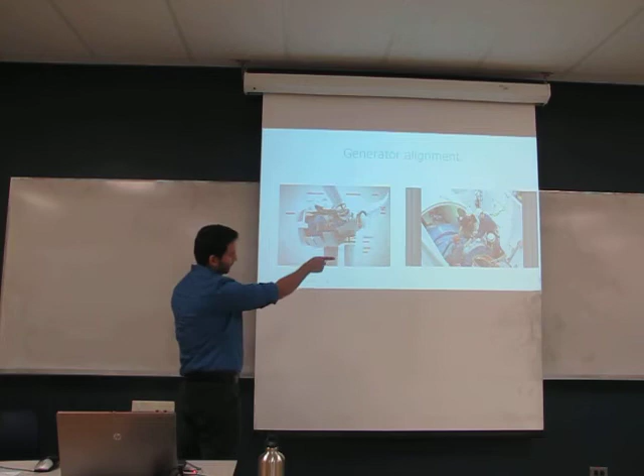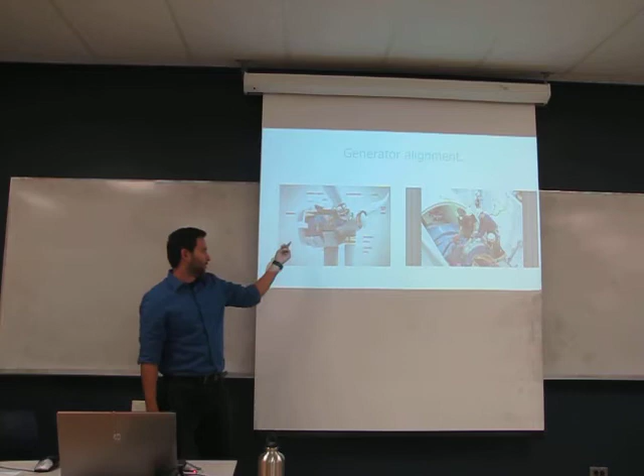Another task was a generator alignment. What you can see over there is three technicians working on the generator. The generator is located on the back part of the turbine. You can notice that the generator is connected to a shaft, which is connected to the blades.

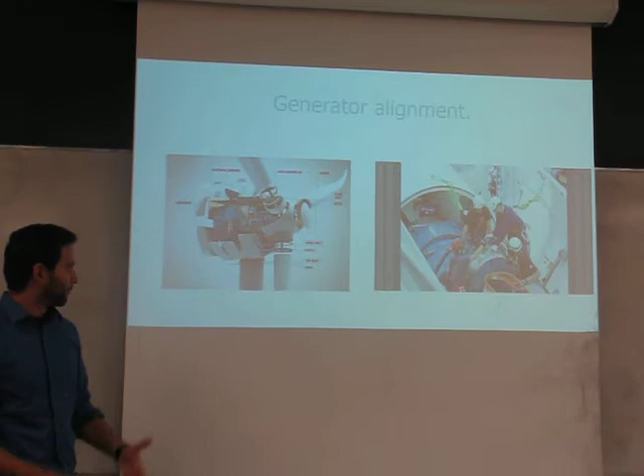With time, because of the force of the wind, that shaft may get a little bit twisted, and that might result in damages to the generator. So we would normally spend like 4 hours measuring and using some hydraulic jacks to make the shaft in a straight angle with the generator.

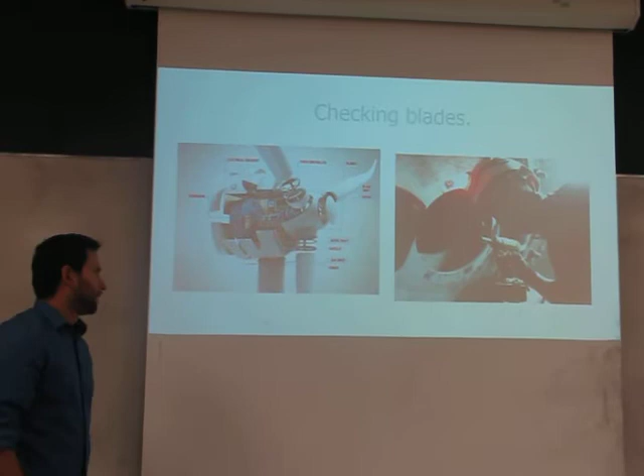Another of the tasks was checking the inside of the blades. The blades of the turbine are made of fiberglass. They are hollow inside. So in that picture, I am inside what they call the hub, which is this metallic, it's a sphere made of metal. The blades are connected to it.

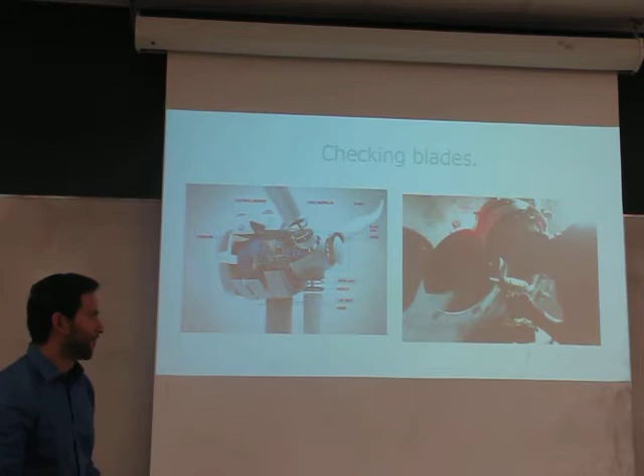Normally I would go inside that hub. Inside there is a very dark place, so you use a headlamp to get some illumination. You're supposed to go and check if there is any crack or any sign of damage.

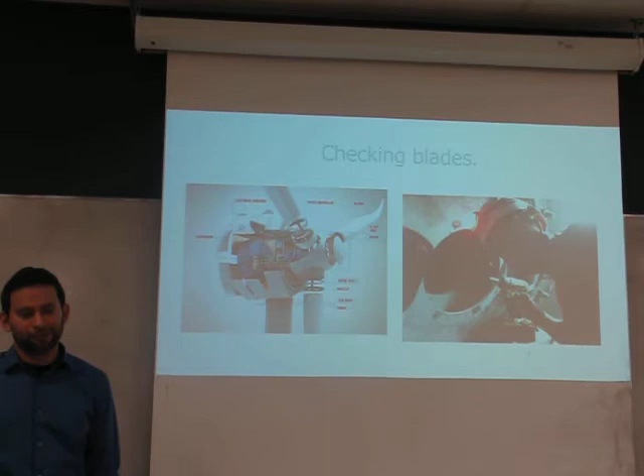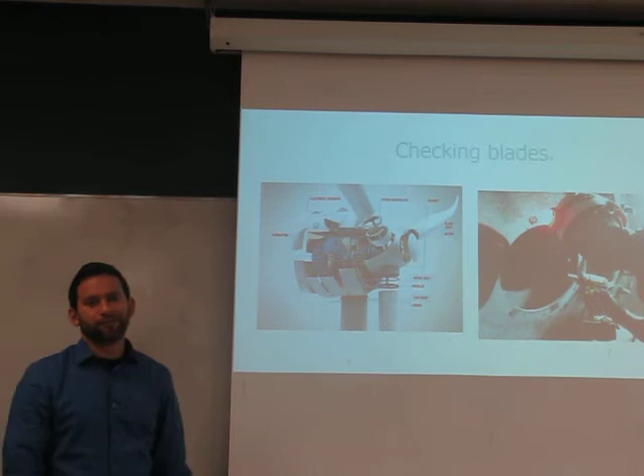Other than that, you're supposed to check what they call a lightning card, which looks like a regular credit card inside an electronic reader. What it does is that every time lightning hits any of the blades, that card can register data from that, like voltage or current going through the whole tower.

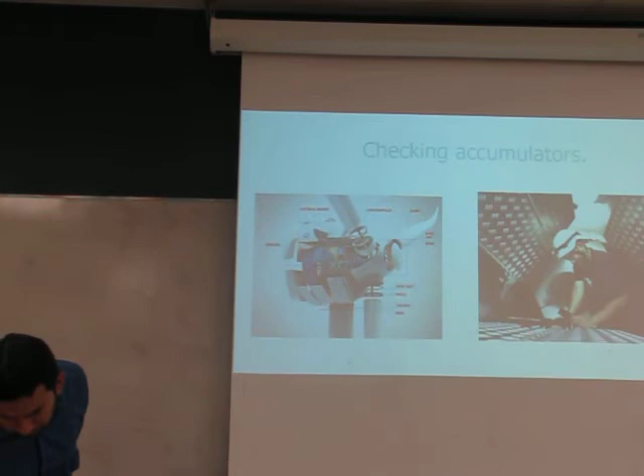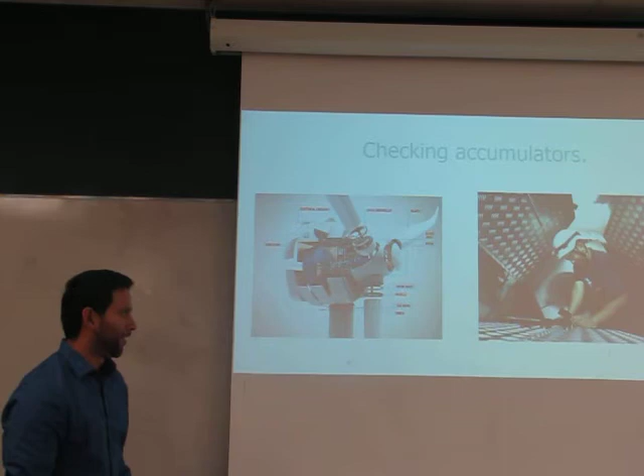Checking accumulators. On that picture, I'm still working inside the same part. That was one of the many confined spaces that you get to work in when you are up there. My job there was just checking the pressure of around 9 cylinders full of nitrogen.

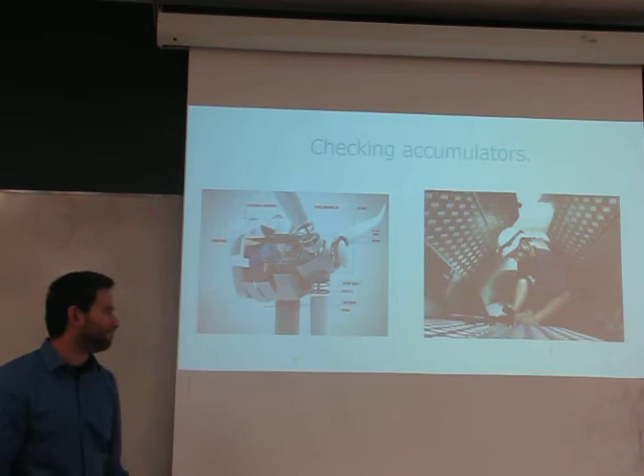They are used to keep the pressure of some pistons that move the blades of the turbines. And the blades move 180 degrees to try to catch the best wind they can. So the accumulator needs to be at a very specific pressure.

On the last part of the service for the turbines, we would run some tests. The test consisted in moving the turbine 360 degrees, moving the blade, as I explained before, and checking the crane on the top of the turbine. That is the crane that we used to get all the bags full of tools, because there's no way that we can climb with all those tools. Each bag is around 50 to 60 pounds.

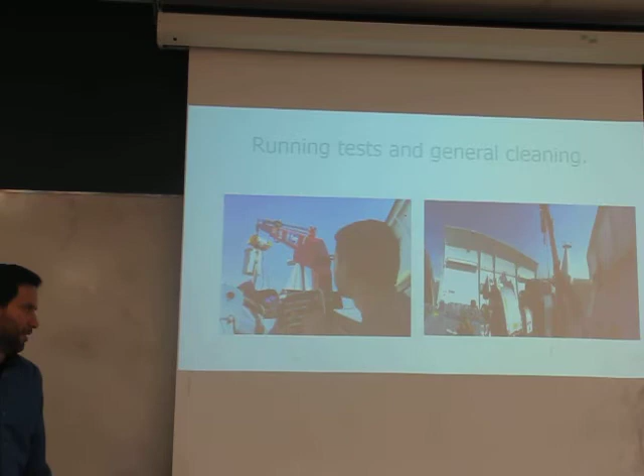And after that, we would spend the rest of the day cleaning everything, because after changing the grease, changing oil, changing some filters, everything is full of oil. So we would spend probably around 4 hours cleaning with the sprays and rags until everything is shiny and clean.

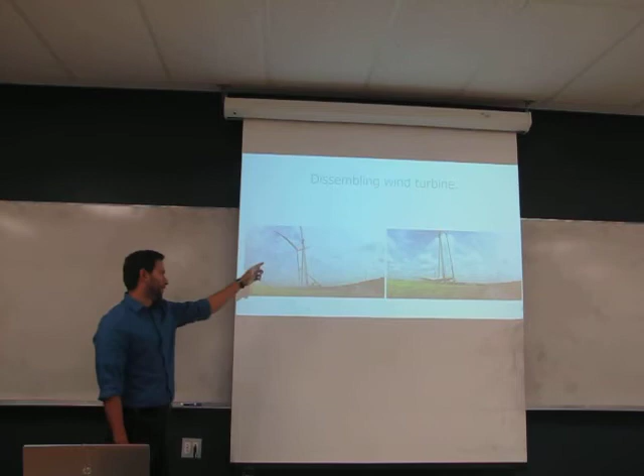Another task that is not part of the routine: when something gets broken on the top, sometimes they need to take the whole turbine apart, like in this case. A gearbox on the top got something broken. So you can see in the picture they are taking the 3 blades off of the turbine and they are moving it to the ground.

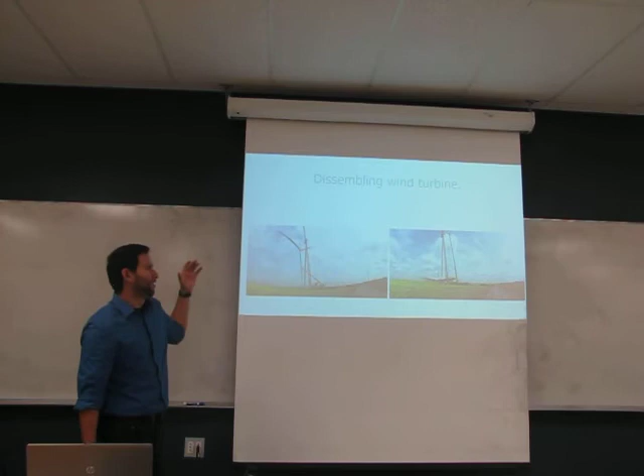What I am doing in this picture is holding this rope, and there is another person holding another rope on the other blade. That was just to get the load stable while the crane was moving everything down. Oh, and by the way, each blade is 50 meters long. So sometimes when you see it, it doesn't look that big, but when it is on the floor, you can really appreciate how big it is.

About the courses that prepared me for the work, I would say that electrical machines was one of them, because basically the wind turbine is a generator, and in that course we learned the basic theory about how a generator works. Same with Applied Science 3, that gave me a background about how flux and voltage are related.

With electrical measurements, we learned about the Y and delta connections. Indeed, in my co-op placement, I was able to see some real-life delta connections, Y connections. They don't look anything like how I imagined. So that was really interesting to see some connections in real life. Then computer systems, because one of the tasks was to change some electronic cards inside some computers in the turbines.

What was the work culture like? Well, I have to say that they were extremely friendly. They were very professional, very intelligent people. They were really welcoming since the first day. And I think the reason why they are so close and friendly is because it is a small group. There are only 5 people working there, so they have known each other for years.

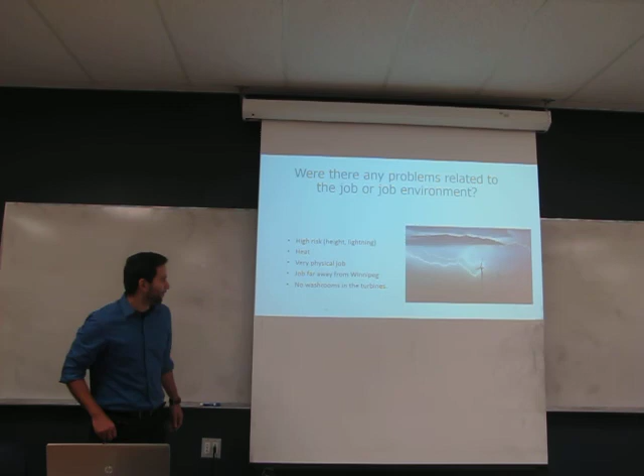Did the employer offer me permanent employment? They didn't, because there is a policy at Siemens to hire people with a post-secondary degree or diploma, and I haven't finished mine yet. But they strongly encouraged me to apply for a job. They are planning to double the number of wind turbines here in Canada in the next few years. So they are actually hiring a lot of people, even people that have a diploma not related to electricity, because they are short on personnel.

Would you like to return to the company? Absolutely. Siemens is a very big company. There is a lot of chance for growth. And that was a very interesting job as well. If you start as a service technician, you can work for a few years doing that, and after that you can move to an engineering position.

Recommendations for future students: I would say just apply for as many jobs as you can, as many good positions. And don't get disappointed if you don't get a job after the interview. Other than that, apply yourself and ask questions. Don't be afraid to break things, because in my case, during my first month, I was breaking a lot of stuff over there, and I was afraid all the time that people were going to get mad at me. But they were really supportive, and they told me that is expected, that I am in training, so I ended up learning a lot from every mistake I made.